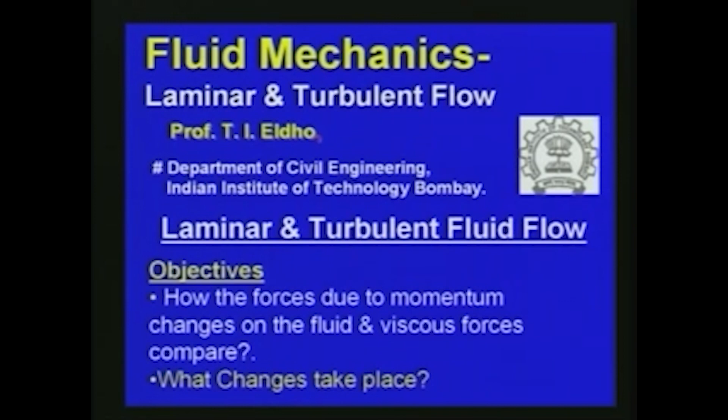So the main objectives of what we are studying in this chapter: we will be checking how the forces due to momentum changes on fluids and the viscous forces compare. So the effect of viscosity, how the flow parameters will be changing, what changes take place, how the fluid will be behaving with respect to viscosity, and how the system will be either laminar or turbulent. So that we will be checking, and then we will look into various types of flow.

We will be checking one of the important aspects, the so-called Reynolds experiments, where Osborne Reynolds utilized his experiments to classify the flow as laminar, turbulent, and other cases. Then we will be discussing laminar flow between parallel plates, laminar flow in pipes, and also turbulent flow in pipes. These are the main objectives which we will be studying in this particular chapter on laminar and turbulent flow.

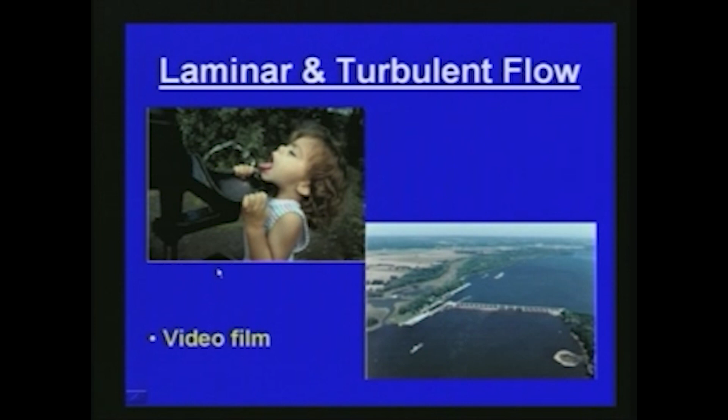One of the experiments we did in our hydraulics lab was a sump pump test. Here you can see one open channel, where the flow is initially laminar, and then there are some pumps, and due to the pumping effect the flow velocity or discharge variation takes place and the velocity increases.

Then the laminar flow at some part of the channel becomes turbulent. The flow becomes very much disturbed, and the laminar flow is transformed into turbulent flow. So in many places, initially the flow may be laminar, and then sometimes it may be laminar, sometimes turbulent.

With respect to this, we will now discuss further what are the important parameters which decide whether the flow is laminar or turbulent, how we can classify the flow, and then we will discuss further theories related to laminar and turbulent flow.

So now, in the same experiment which you have seen in the video, this is a laminar flow, and here due to the pumping effect it is again becoming turbulent. So in some places it is laminar, some places it is in a transitional stage, and here you can see the flow becomes turbulent.

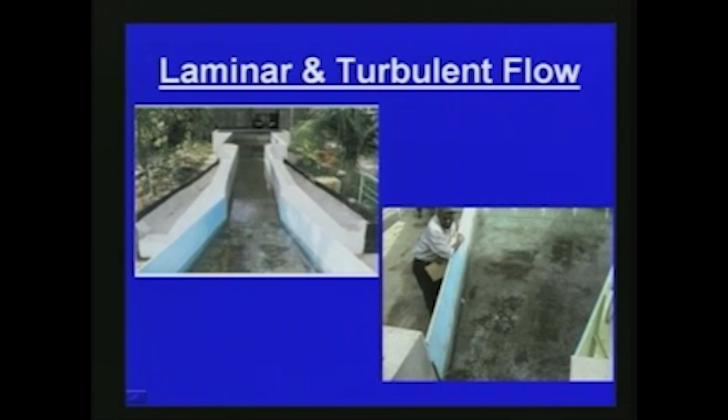So now, with respect to the various theories on laminar and turbulent flow, you can see that most of the time we are dealing with real fluids. As far as real fluids are concerned, viscosity of the fluid is a very important parameter, and viscous effects play a major role.

Due to the viscous effect, as shown in this slide, there will be a no-slip condition on the boundaries. The flow, before becoming fully developed, is affected by boundary layer effects and viscosity effects. Initially the flow can be laminar, and then after some time, depending upon the flow condition, it can become turbulent. So viscous effect is very important in fluid mechanics in the case of real fluids.

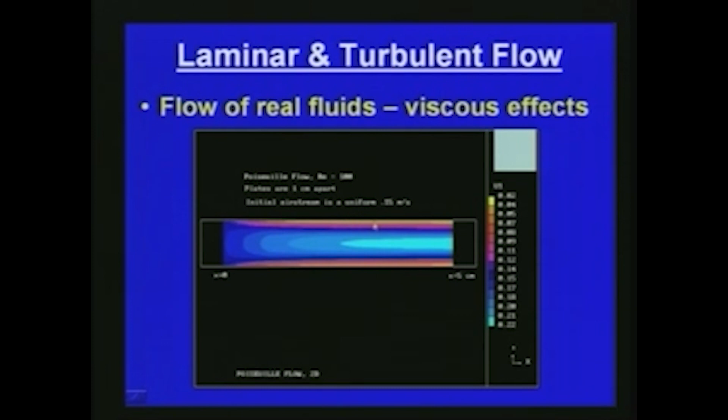Due to the viscosity or viscous effects, the fluid tends to stick to the solid surface on both sides. Due to this sticking effect, or no-slip condition, a boundary layer is created, and the flow pattern can change whenever the flowing fluid is interacting with a solid surface.

Similarly, stresses also play a major role as far as the flow is concerned, when we are classifying the flow into laminar or turbulent. These stresses are also very important - shear stresses, normal stresses - and how they act within the fluid is also very important.

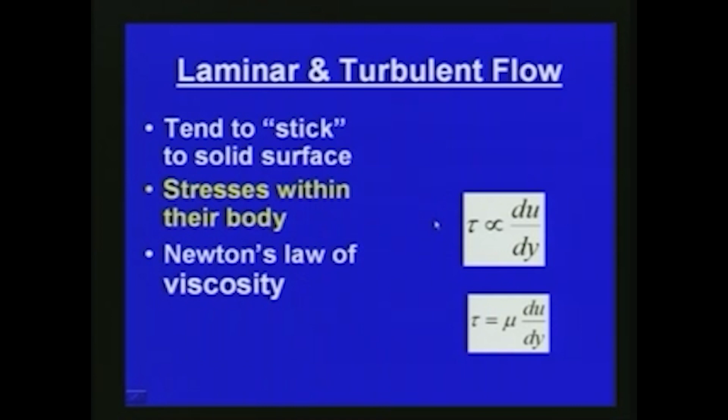While discussing laminar and turbulent flow, another important aspect is Newton's law of viscosity. We have already seen in our introductory lectures that Newton's law of viscosity states that the shear stress is proportional to the velocity gradient: tau is proportional to du by dy.

With respect to the dynamic coefficient of viscosity, we can write tau equals mu times du by dy. This is Newton's law of viscosity: the shear stress is equal to the dynamic coefficient of viscosity multiplied by the velocity gradient. This law is also very important when we discuss laminar and turbulent flow.

Now we are discussing laminar and turbulent flow. With respect to this, it will be interesting to revisit the earlier classification from our introductory lectures - the types of fluid flow. We have seen that fluid flow can be classified with respect to rheological considerations like liquids and gases, and dilational considerations like whether it is compressible or incompressible.

Temporal variations with respect to time, whether the fluid flow is transient or steady state, and spatial dimensions, whether the flow we are considering is one, two, or three dimensional, and also the motion characteristics - whether it is laminar or turbulent. These types of fluid flow we have already discussed earlier.

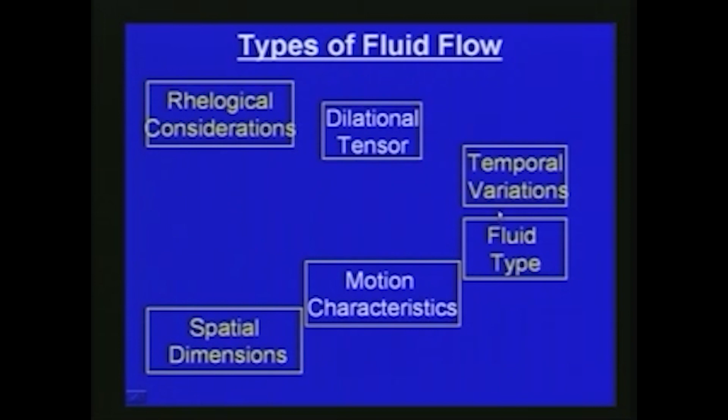When we discuss in detail about laminar and turbulent flow, various aspects are important: what kind of fluid we are dealing with, what kind of motion characteristics, what spatial dimensions we are considering, and what temporal variations - all these are important when we discuss whether the fluid is laminar or turbulent.

Accordingly, this chart we have seen earlier in our introductory lecture shows that fluid flow can be classified as gas or liquid, or with respect to dilational characteristics - whether the fluid flow is compressible or incompressible - or with respect to temporal variations - whether it is transient or steady state.

With respect to viscous effect, whether viscosity is considered or it is an inviscid, non-viscous fluid, and also rotational flow or irrotational flow - especially for turbulent flow, the rotational effect is very important - and also the dimensions considered, whether one, two, or three dimensional. These types of fluid flow parameters are very important with respect to what we are discussing now: laminar or turbulent flow.

Before going into more details of laminar and turbulent flow, the types of fluid flow can also be classified according to the geometry of the flow field. Most flow, with respect to geometry, can be classified as either internal flow or external flow. Internal flow means it involves flow in a bounded region.

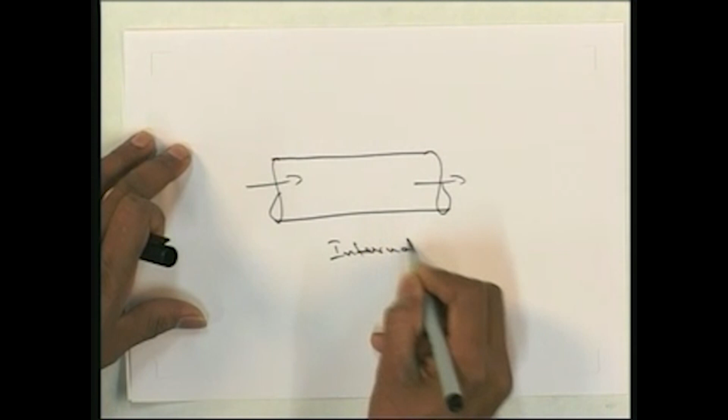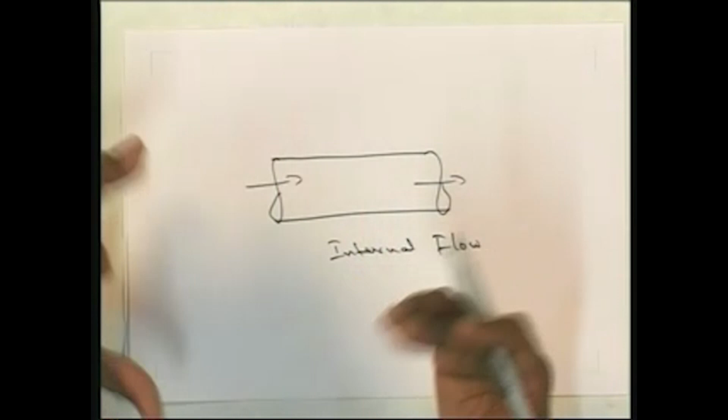An example is pipe flow, just like you can see here. The flow is taking place in this way, and we call it internal flow because the flow is confined within the boundary of the pipe. That is why we say it is internal flow. The approach we use to analyze this kind of flow will be different from what we call external flow. This pipe flow is an example of internal flow.

The other classification based on geometry is external flow, where the fluid flows in an unbounded region. It can be just like the flow pattern around a body immersed in the fluid.

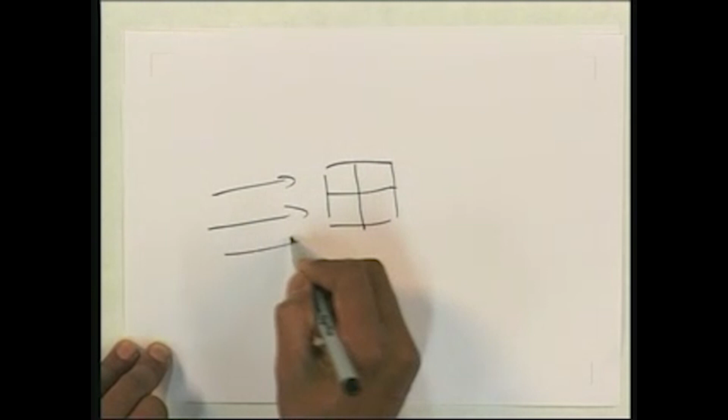For example, consider a building. If the wind comes, you can see what happens with respect to the surrounding of the building. This is very important for many engineering designs. This kind of flow, where we look at what happens around a particular body or structure, where the fluid flow is in an unbounded region, is so called external flow.

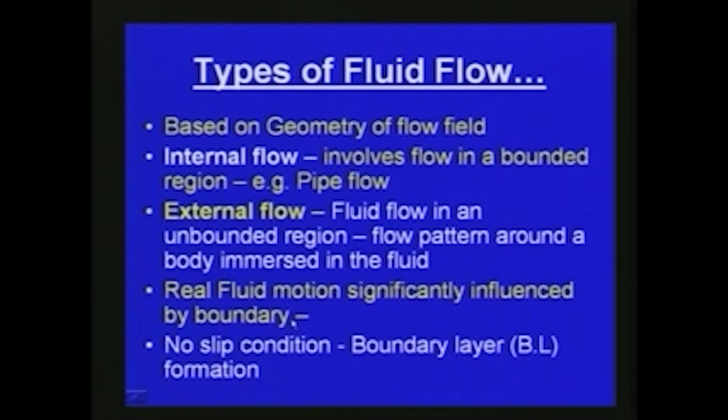This is also very important when we discuss laminar and turbulent flow. The real fluid motion is significantly influenced by the boundary, whether it is internal flow or external flow. As in the case of pipe flow, the solid surface where the fluid is in contact has a no slip condition.

So the boundary is very important. The no slip condition and boundary layer formation are very important as far as flow is concerned, whether it is internal flow or external flow, such as around a building or whenever a boat is moving in a river. What happens surrounding the boat or the ship is very important. The formation of the boundary layer is also important with respect to the laminar and turbulent flow we will be discussing, whether it is external or internal flow.

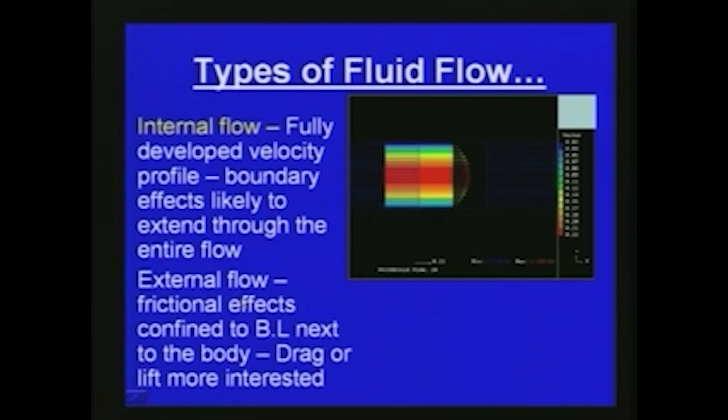This is again the internal flow case. As far as external flow is concerned, the frictional effects are confined to the boundary layer next to the body, and here the drag or lift are more important. For example, whenever a balloon is lifting through the air, you can see what happens with respect to the lift effect or the drag effects. That is also very important as far as the types of fluid flow are concerned. This is the case of external flow.

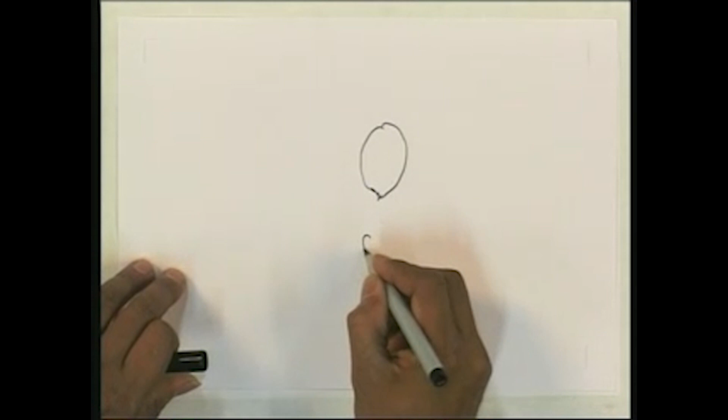As far as laminar and turbulent flow is concerned, whenever we discuss these kinds of problems, we have to see whether the flow is external flow or internal flow. Now, for the case of free flowing water, let us inject a dye into the middle of a stream.

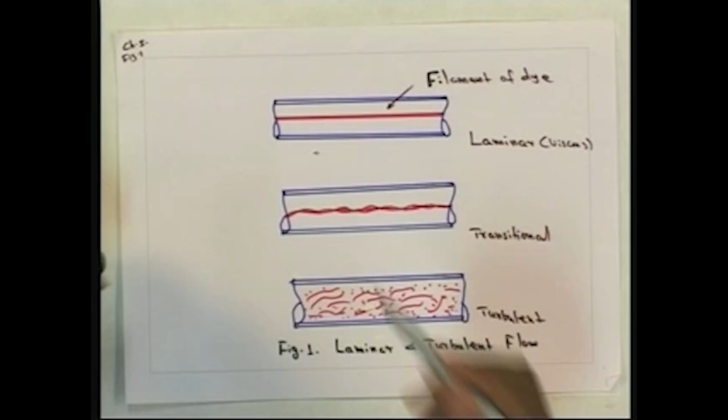So here you can see, if we inject a dye into the middle of a pipe flow, with respect to the velocity of the flow in the pipe, initially the fluid velocity is small. Then the dye which we are injecting will just be moving like a filament of dye, in layers. So this is what we call laminar flow, where the flow is in layers and there is no disturbance taking place.

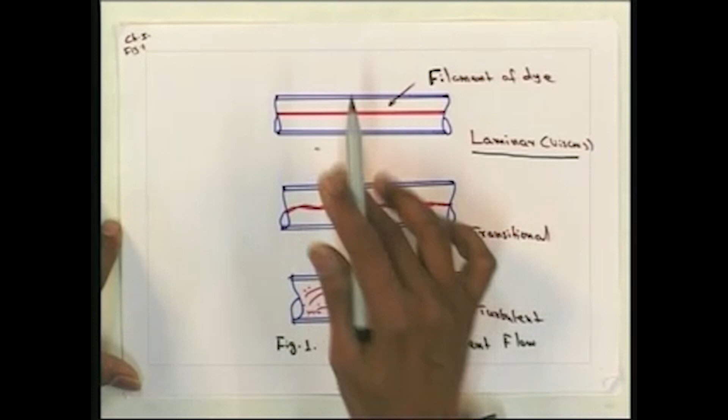But then the velocity of the flow increases. So after some time, in the second figure, you can see slight disturbance starts. Earlier the flow was in layers, and then slight disturbance starts. Finally, when the velocity is further increased, the dye is totally mixing within the fluid, there is a lot of disturbance, the fluids are intermixing, and the dye will be totally mixing with the fluid inside the pipe.

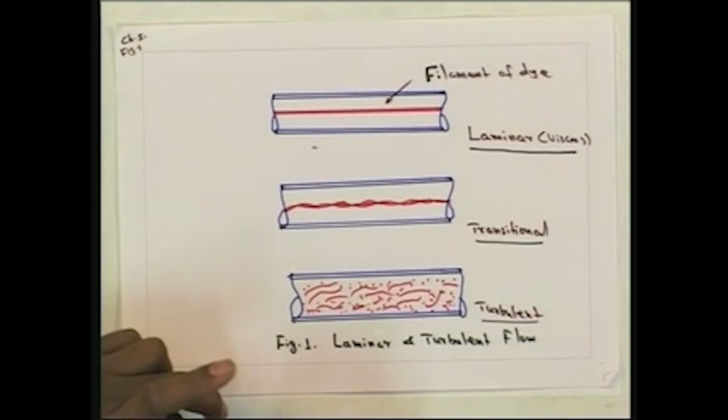So initially when the velocity is small and we are injecting only a small filament of dye, it is laminar. When the velocity is increased, it becomes transitional flow, and finally a lot of mixing takes place and it becomes turbulent flow. In a similar way, a flow may be laminar for some time, but if the flow parameters like velocity change, it becomes transitional, and further it becomes turbulent. So depending upon various flow parameters, the fluid flow changes from laminar to turbulent.

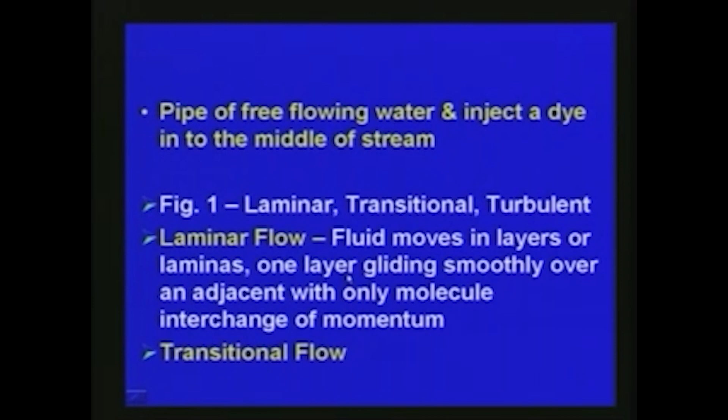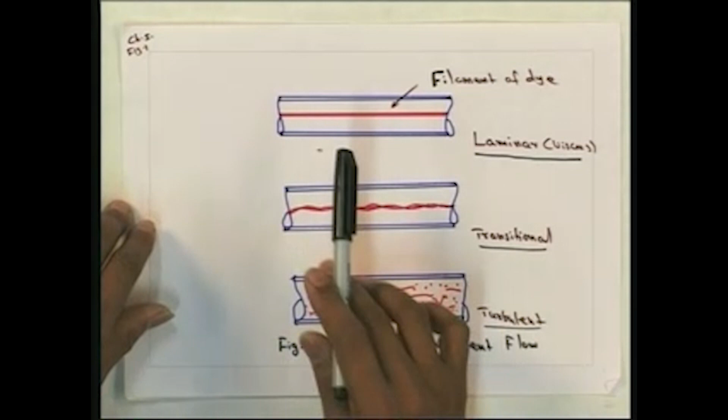So now, with respect to what we discussed, what is laminar flow? In laminar flow, the fluid moves in layers or laminas. We define laminar flow as the fluid moving in layers or laminas, one layer gliding smoothly over the adjacent one, with only molecular interchange of momentum. You can see this with respect to the first figure: the fluid moves in layers, one layer gliding smoothly over the adjacent layer, with only molecular interchange of momentum taking place. This is the definition of laminar flow.

But as I mentioned, when the velocity or other flow parameters change, some kind of mixing takes place. Instead of smooth gliding, mixing starts, and we say that the flow is transitional.

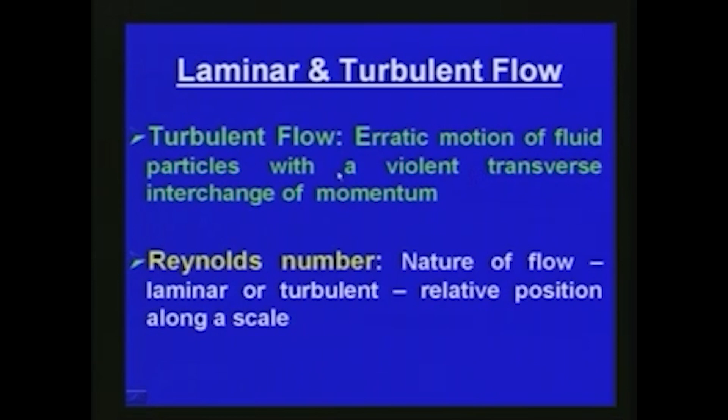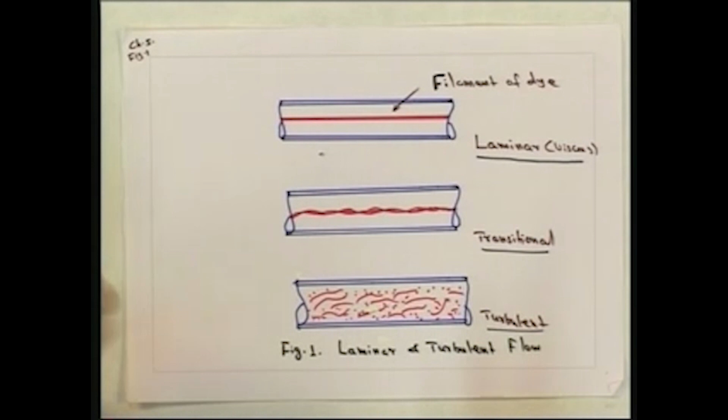As far as turbulent flow is concerned, there is erratic motion of fluid particles with a violent transverse interchange of momentum. So turbulent flow is defined as erratic motion of fluid particles with a violent transverse interchange of momentum. Whenever we injected the dye, when the velocity is increased or other flow parameters change, there is total mixing of the dye within the fluid, and the flow becomes totally turbulent. So we define turbulent flow as a flow where there is erratic motion of fluid particles with a violent transverse interchange of momentum.

So now the question is: whenever a fluid flow is there, how can we define whether it is at the laminar stage, the transitional stage, or the turbulent stage? This is a very important question, since most of the time we will be dealing with pipe flow, open channel flow, river flow, canal flow, and many other kinds of flow. So it is very important to see whether the fluid flow is laminar, transitional, or turbulent.

The reason is that most of the theories we apply to laminar flow may not be applicable to turbulent flow. So many flow parameters need to be changed, and the theories will change as the flow changes from laminar to turbulent.

In most fluid flow cases it is very important to define whether the existing flow is in laminar state, in transition state, or turbulent state. A large number of scientists and engineers worked on this topic, and in the late 19th century, around the 1880s, famous scientist Osborne Reynolds defined a number called the Reynolds number. Using this dimensionless number, we can define whether the concerned flow is laminar or turbulent.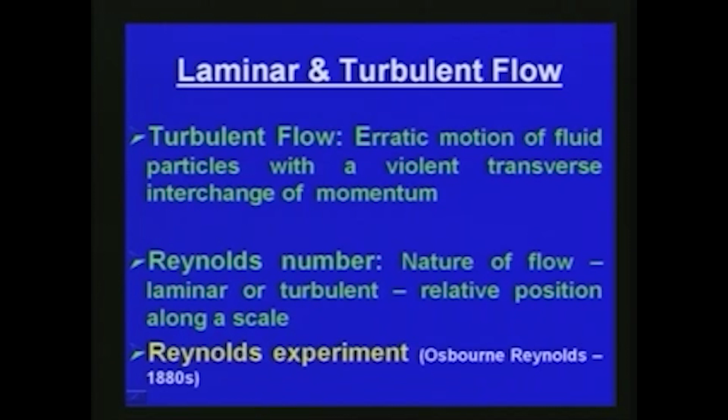For example, in open channel flow, if the Reynolds number is less than or equal to 500 the flow is laminar, or when it exceeds 600 or 1000 it becomes turbulent. So this Reynolds number is a relative scale that gives the position of whether the flow is laminar or turbulent. Osborne Reynolds defined this number based upon a large number of experiments with respect to fluid movement, called Reynolds experiments, conducted in the 1880s, end of the 19th century, and from these he defined this so-called Reynolds number.

In the Reynolds experiment, there is a large tank where water is filled, and a pipe is connected to that tank with a valve attached at the end of the pipe. A small tank containing dye is introduced inside the large tank, and through a small nozzle the dye is introduced into the pipe where the pipe starts, as shown in the figure. Then he slowly started to open this valve.

You can see the flow with respect to the dye, and the fluid movement is laminar in nature. With respect to this color we can easily identify this. Initially, whenever the valve opening is small, the velocity is small and the discharge is also small.

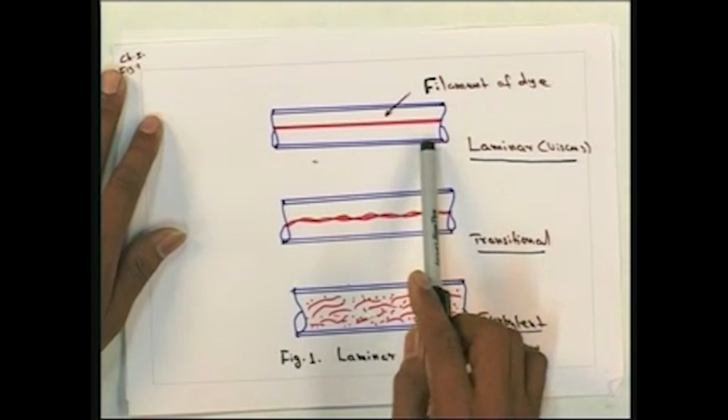With respect to the dye we can visualize the fluid moving in layers or laminas. When the valve is opened more, the fluid which is moving in layers starts to show some disturbances, and some oscillation begins in the fluid.

When the valve is opened further, the velocity increases, and with respect to the dye movement we can visualize that mixing takes place, interchange of masses occurs, and erratic motions take place, and finally the flow becomes turbulent.

That is what Osborne Reynolds did in the 1880s, and based on a large number of experiments as mentioned, he defined the so-called Reynolds number which we have seen.

After many experiments, Reynolds showed that a particular ratio, rho V D by mu — where rho is the mass density of the fluid, V is the average velocity, D is the diameter of the pipe, and mu is the dynamic coefficient of viscosity — helps to predict the change in flow type. He defined this ratio as the Reynolds number, which is a dimensionless number.

Osborne Reynolds defined this number as the Reynolds number, which is the ratio of inertial forces to viscous forces. So the Reynolds number equals inertial forces divided by viscous force, and for pipe flow we define it as rho V D by mu, where rho is the mass density of the fluid, V is the average velocity, D is the diameter of the pipe, and mu is the coefficient of dynamic viscosity.

So similarly we can define this Reynolds number for open channel also. With respect to his experiments, he put this Reynolds number as a scale to define whether the fluid flow is laminar, whether it is in the transitional stage, or whether it is in the turbulent stage.

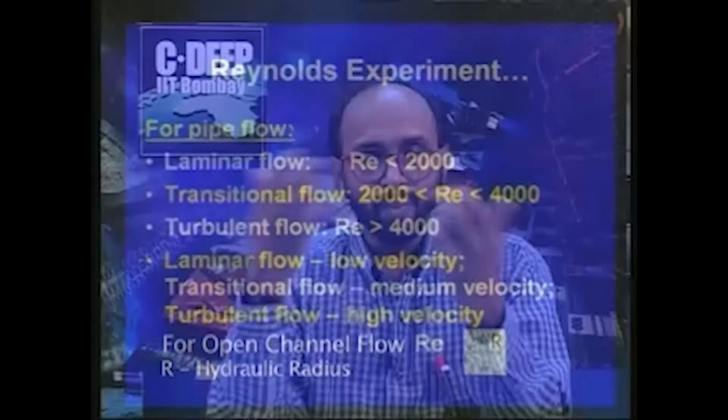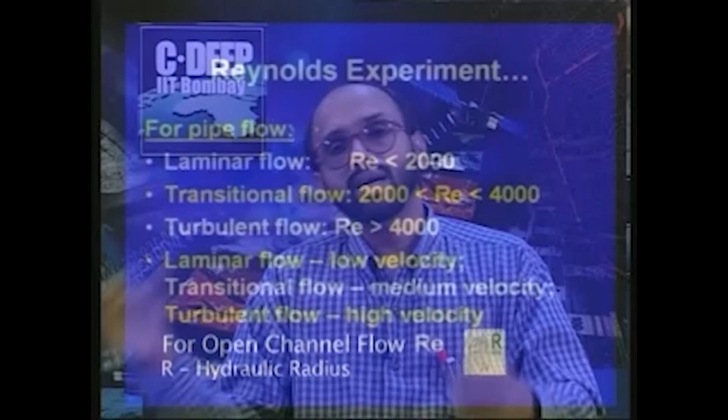Now with respect to this Reynolds number, let's consider pipe flow. We can show that generally, with respect to various conditions, when the Reynolds number is less than or equal to 2000, the flow is laminar. In the range between 2000 to 4000, mixing and disturbance start, and a transitional state occurs. Beyond 4000, when the Reynolds number is greater than 4000, the flow becomes turbulent. So for pipe flow, below 2000 the flow is laminar, between 2000 to 4000 it is transitional, and beyond 4000 the flow is turbulent.

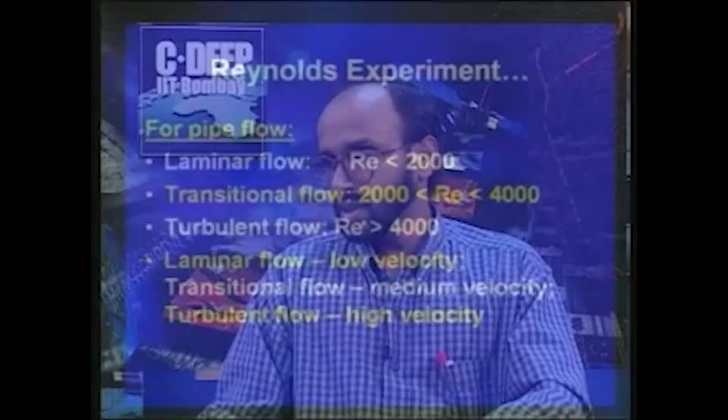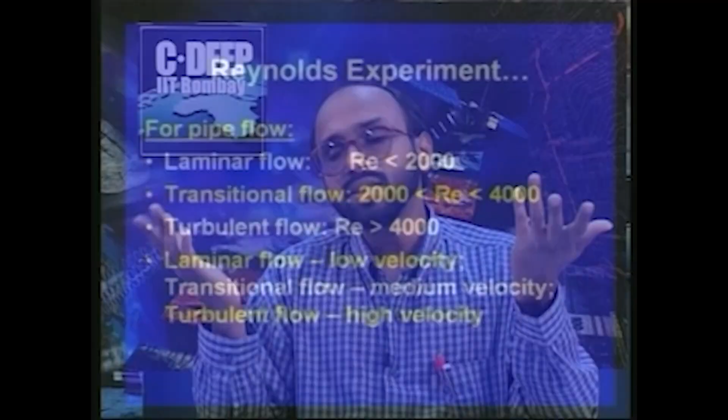Through experiments we can show when the flow is laminar. With respect to the Reynolds number, we can see that whenever the flow is laminar, the velocity is low. At transitional flow there is medium velocity, and when the flow becomes turbulent, the velocity is high. So this is the case of pipe flow.

Similarly, if we do experiments in open channel with respect to various conditions, generally the flow will be laminar when the Reynolds number is less than or equal to 500, and from 500 to 2000 it may be at a transitional stage, though this can vary slightly. Beyond 2000, open channel flow can be turbulent in nature. This exact range depends on various other flow conditions existing in the flow regime, such as boundary conditions or initial conditions. Depending upon these, the range can vary, but approximately this is the range put forward by various scientists and engineers for open channel flow and pipe flow.

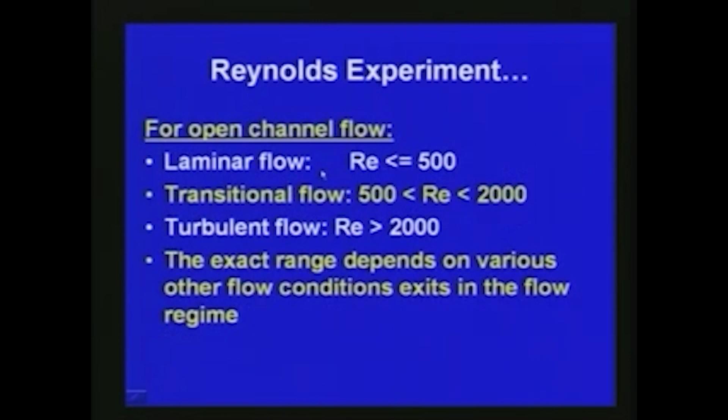Now, with respect to the Reynolds experiments we have seen, we can put forward certain interpretations. First, when viscous forces are dominant—recall the Reynolds number is the ratio of inertial force to viscous force—we can interpret that when viscous forces are dominant, the flow is slow, or the Reynolds number is low, and they are sufficient to keep all fluid particles in line, so the flow is laminar. Even if there is any tendency for disturbances, for this kind of flow where the velocity is low or slow and the Reynolds number is low, the disturbance will be dampened, and the flow remains laminar since viscous forces dominate.

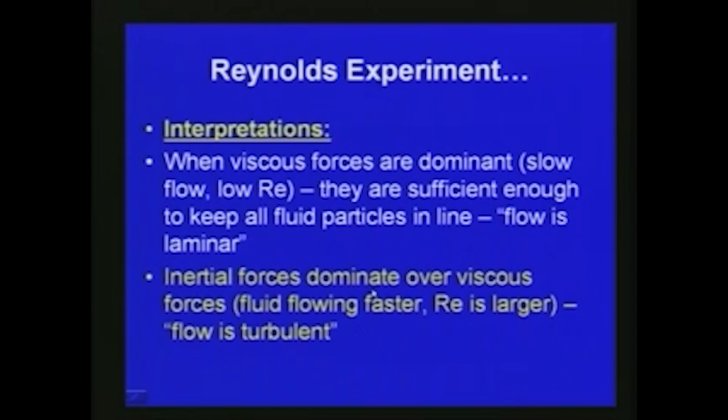Whenever the fluid flow is faster, or the velocity is larger, the Reynolds number is larger, and inertial forces dominate over viscous forces, the flow finally becomes turbulent. So with respect to the fluid flow velocity, depending on whether the Reynolds number is lower or higher, and whether viscous forces or inertial forces are dominant, we can classify whether the flow we are dealing with is laminar or turbulent in nature.

Now, while conducting these experiments, we have seen that in a certain range the flow is laminar, and beyond that it becomes transitional or turbulent. When we conduct a large number of experiments, we can define a lower critical Reynolds number, above which the flow changes from laminar to transitional or turbulent.

So this is the so-called lower critical Reynolds number. Now, for example, consider the velocity of flow with respect to the valve movement, if the velocity is reduced. In a similar way, when the flow transforms from laminar to turbulent in the opposite direction, when we reduce the valve opening, the flow velocity will slowly come down, and there will be a transition from turbulent to transitional or turbulent to laminar. There we define a Reynolds number called the upper critical Reynolds number.

So here, the Reynolds number below which turbulent flow changes to laminar flow. This critical Reynolds number has two ranges: one is the lower critical Reynolds number, and the other is the upper critical Reynolds number.

This critical Reynolds number is what we use to classify flow as laminar or turbulent. This varies depending upon various flow conditions, like what kind of fluid, and what the boundaries are, as we've seen, whether it's pipe flow or open channel flow. So it's difficult to put an exact range for when the flow is transforming from laminar to turbulent, since this depends upon various other flow conditions as well.

But generally we prescribe a lower critical Reynolds number where the flow changes from laminar to turbulent or transitional, and an upper critical Reynolds number where the turbulent flow changes to laminar flow.

Now, whenever we conduct these kinds of experiments in the laboratory, we can see that laminar flow, which we've seen is flowing in layers, at some stages shows instability. Here the inertial forces associated with the fluid mass try to amplify the disturbances in the flow.

Initially if the flow is laminar, there can be different kinds of disturbances like boundary friction or shearing effects. The inertial forces associated with the fluid which is flowing try to amplify the disturbance in the flow. So then we say there is instability of laminar flow.

Viscous forces try to damp these disturbances, but if the forces trying to amplify the disturbance predominate over the viscous forces, then the laminar flow becomes unstable, or instability of laminar flow takes place. Depending on fluid characteristics like mass density, viscosity, velocity gradient, and proximity to boundary, etc., the disturbances are dampened or amplified.

So for the given conditions, if the disturbances are dampened, the flow continues as laminar. But if the disturbances are amplified further due to various forces like shear force or frictional forces, it may change from laminar to turbulent flow, or we say the laminar flow becomes unstable. So if the disturbances are dampened, the flow is laminar; otherwise, we say the flow becomes turbulent.

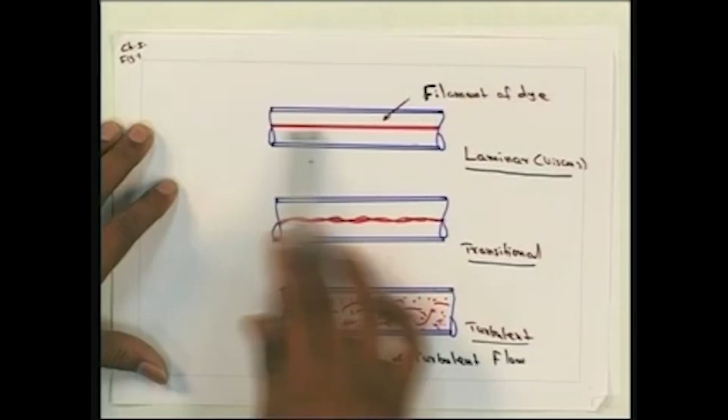Now, with respect to turbulent flow, the important characteristics which we observe in nature or in the laboratory include irregularity. When the flow is laminar, it's very regular, with one layer sliding over the other. But when the flow becomes turbulent, some important characteristics emerge: first, the flow is irregular in nature, and second, diffusivity.

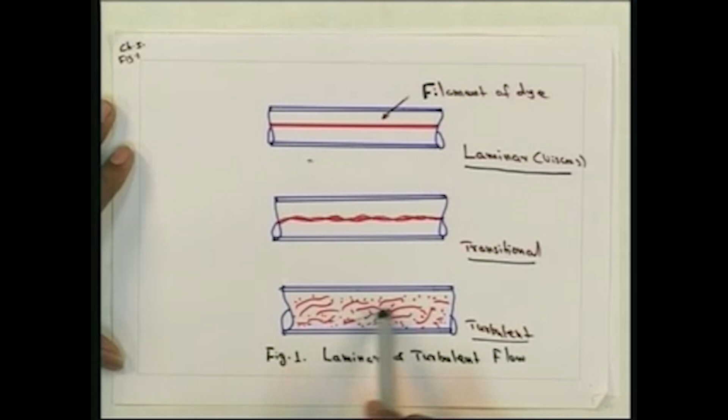As far as diffusivity is concerned, in laminar flow, molecular diffusivity is more important, but in turbulent flow, turbulent diffusivity is much more significant than molecular diffusivity as the flow changes from laminar to turbulent. Other important characteristics include high Reynolds number, as we've already seen, and in many cases the flow may be rotational in nature.

Most laminar flow has very minimal rotational effect, or it can even be irrotational in nature, but most turbulent flow motion will be rotational in nature. Due to this, we have to consider the fluid flow in 3 dimensions, since in one or two dimensions it is very difficult to see what is realistically happening, how the disturbance takes place and in which direction.

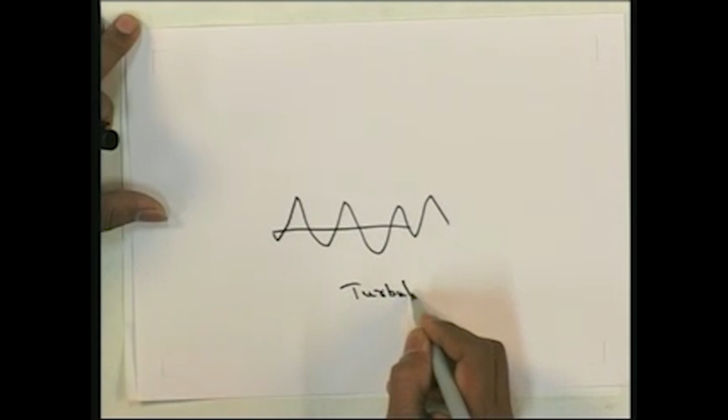So most of the time, as far as turbulent flow is concerned, we have to do 3-dimensional analysis. Motion can be rotational and in 3 dimensions, and then the fluctuations can be wide spectrum. If the flow is laminar, it stays laminar, but whenever the flow becomes turbulent, the fluctuations that take place will be wide spectrum.

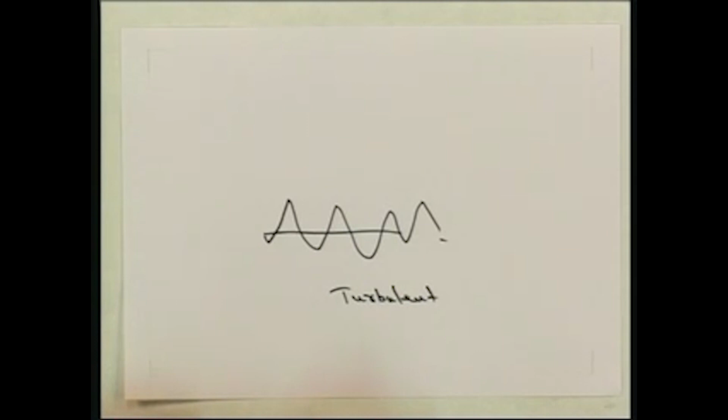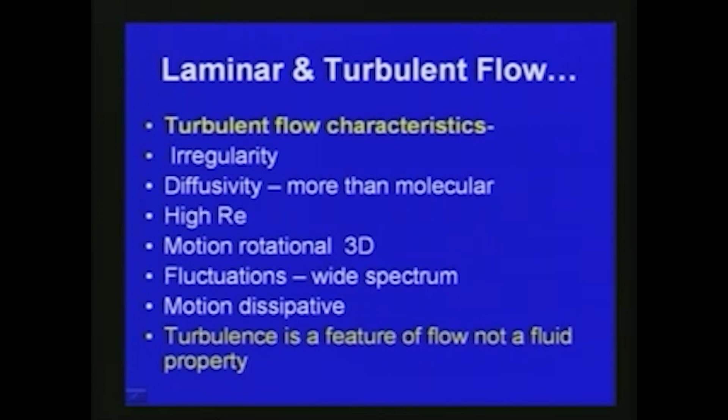Another important characteristic of turbulent flow is that the motion is dissipative, so various energies like heat energy will be dissipated with respect to the turbulent flow. So we can say that turbulence in a flow is a feature of flow, but it is not a fluid property. It is difficult to say turbulence is a fluid property, but we can define it as a feature of the flow.

So now we will be discussing various aspects of laminar flow and turbulent flow in detail in this chapter. Initially we will discuss laminar flow, seeing the various flow characteristics as far as laminar flow between parallel plates, and then laminar flow in pipes. Then further we will discuss turbulent flow.

So the first topic is laminar incompressible flow between parallel plates. Here we will be deriving various relationships like the velocity variation and the shear stress variation, etc., as far as laminar incompressible flow between parallel plates is concerned. Let us consider the flow of a viscous fluid between two very large parallel flat plates spaced at a distance of 2h, or equal to 2y, apart.

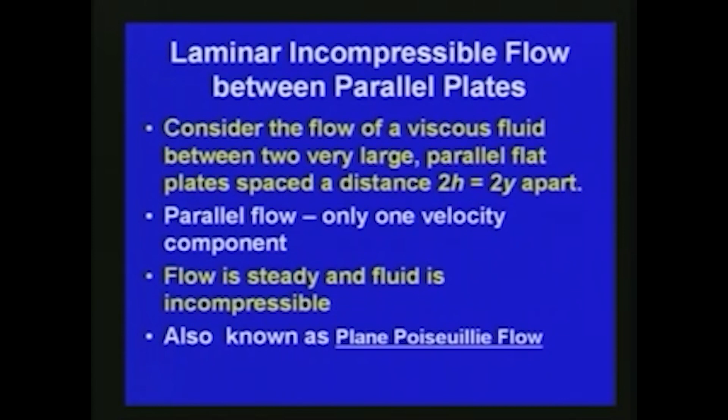Starting with 0 on both sides and maximum at the center. So if you plot the velocity, we can see that it will be parabolic in nature, 0 on both sides of the parallel plates and then maximum at the center.

Now we will discuss further to get the velocity variation. Once the velocity variation is known, we can find out the shear stress or other fluid flow parameters. So we are considering the flow as two-dimensional in nature. For two-dimensional flow, we have already seen that the continuity equation we can write as del u by del x, where velocity in x direction is u, and velocity in y direction is v.

We can write from the continuity equation del u by del x plus del v by del y is equal to 0. This is the continuity equation. Now since the streamlines are straight, if you plot the streamlines they are parallel, and it is parallel to the x direction.

So you can see that here the velocity component v is equal to 0. So finally, for this particular case, there will be only one velocity component in the x direction, the other velocity component v is equal to 0.

So from this continuity equation we can write del v by del x is equal to del v by del y, and since v is equal to 0, del v by del x is equal to del v by del y is equal to 0.

If we put this into the continuity equation, we can write del u by del x is equal to 0. That means for this particular case, laminar incompressible flow between parallel plates, velocity does not change with x, velocity field v is equal to 0, and the velocity u is changing with respect to y only.

As you can see the plot here, the velocity is varying with respect to y only, so u is a function of y as written here.

With respect to these simplifications, we can see that the flow is one dimensional and unidirectional. So the flow is one dimensional and in one direction. This type of flow with the velocity profile unchanging as the fluid moves downstream is so called a fully developed flow. You can see the velocity profile here is unchanging as the fluid moves downstream, so we say it is fully developed flow.

Now we want to find out the velocity distribution. We want to get an expression for the velocity variation so that we can plot the velocity. Here we derive the expression for velocity by using the first principle, or Newton's second law, which we have already discussed about and its application earlier.

By using Newton's second law for a particle in the control volume which we are dealing with, we can write mass of particle multiplied by the acceleration of particle is equal to net pressure force on the particle plus net gravity force on particle plus net stress force on particle.

So here we use Newton's second law to derive the equation. For the x direction from Newton's second law, we can write mass into acceleration is equal to pressure force plus gravity force plus shear force. If we consider a small fluid element with mass delta mp and acceleration ax in the x direction, that is equal to delta fx pressure plus delta fx gravity plus delta fx shear.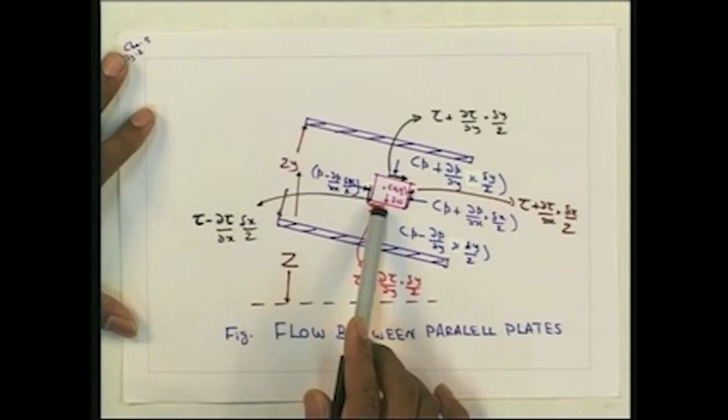So we consider a small fluid element and write the pressure force. On the left side, with respect to this fluid element, we write P minus del P by del x into delta x by 2. Here delta x is the size of the fluid element in the x direction, delta y is the size in the y direction, and the plate is placed at a distance of 2y.

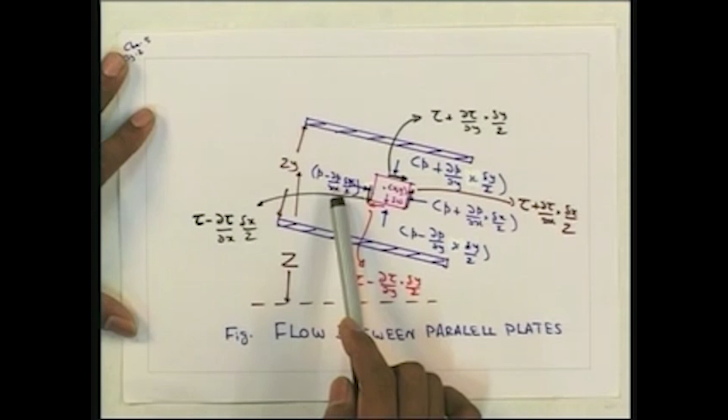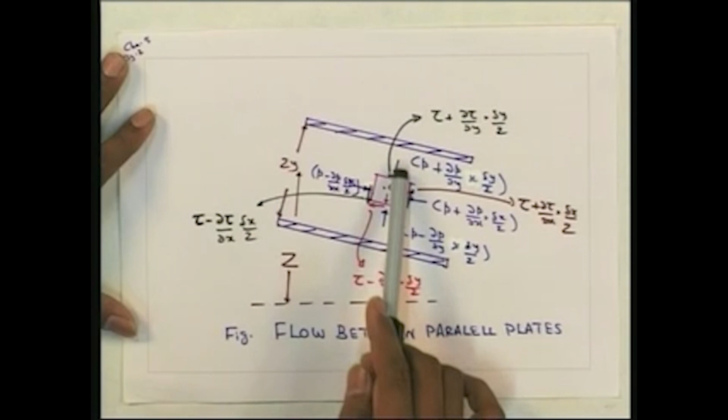So the pressure force on one side is P minus del P by del x into delta x by 2, and on the other side of the fluid element it is P plus del P by del x into delta x by 2. On this side we write P plus del P by del y into delta y by 2, and on the opposite side it is P minus del P by del y into delta y by 2.

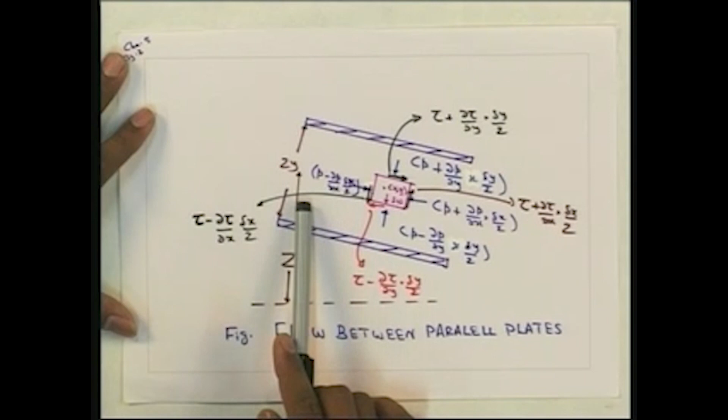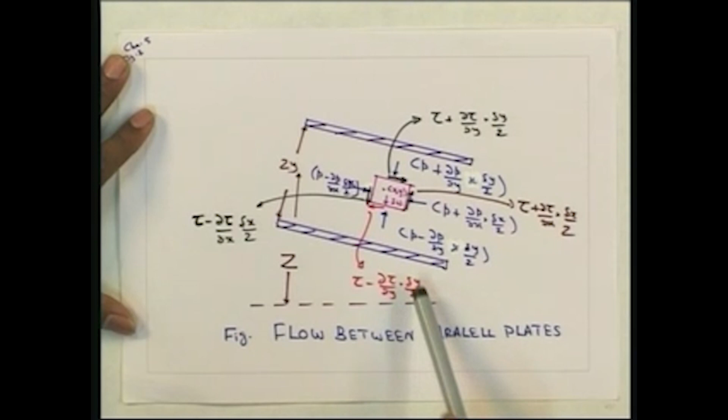Similarly, considering the shear stress, which is another important shear force, on one side we write tau plus del tau by del y into delta y by 2, on another side tau plus del tau by del x into delta x by 2, on another side tau minus del tau by del y into delta y by 2, and on the last side tau minus del tau by del x into delta x by 2.

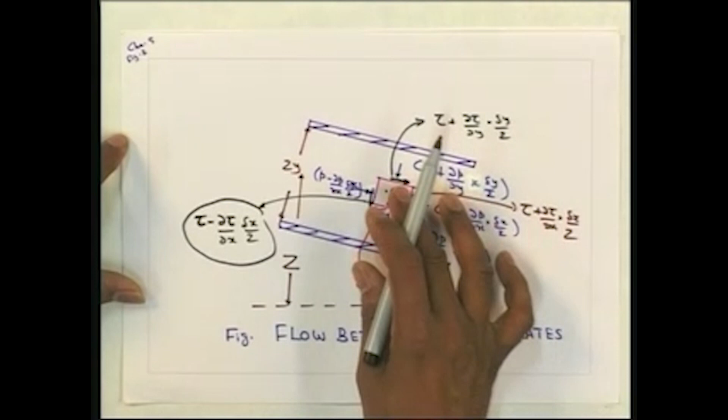So now we are considering this control volume and a fluid element, taking into account all the pressure forces and shear forces. Finally, with respect to this, we can write delta fx pressure as minus del p by del x into delta x into delta y, and if we consider unit thickness, it is multiplied by 1.

Similarly, for the gravity force, delta fx acting on the fluid element will be rho gx into delta x into delta y into 1. This gives the gravity force. For the shear force, with respect to the earlier figure shown, we write del tau by del y into delta x into delta y into unit thickness.

Now by using Newton's second law for the fluid particle or fluid element, the mass of the fluid element multiplied by its acceleration is equal to the pressure force on the fluid particle plus the gravity force on the fluid particle plus the shear force on the fluid particle.

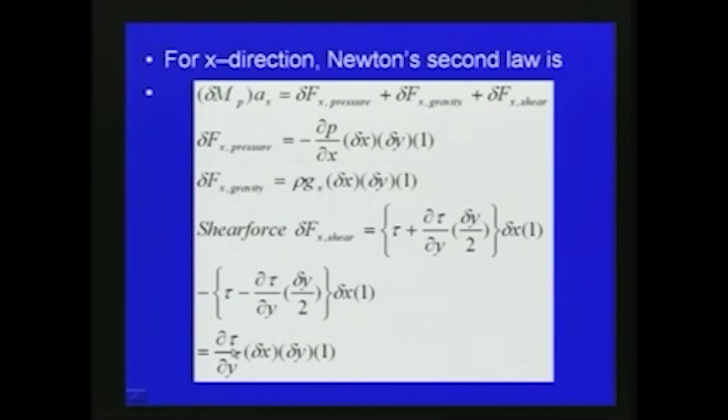So we derived the expression for the pressure force on the fluid element as minus del p by del x into delta x into delta y, the gravity force as rho gx into delta x into delta y, and the shear force as del tau by del y into delta x into delta y.

Now, the acceleration of the particle, as we have seen earlier, we write Ax equal to del u by del t plus u into del u by del x plus v into del u by del y. This gives the local acceleration plus convective acceleration, so Ax equals del u by del t plus u into del u by del x plus v into del u by del y.

Here we are considering the flow as steady state, so del u by del t is 0, del u by del x is 0, and v is 0. So finally Ax is equal to 0.

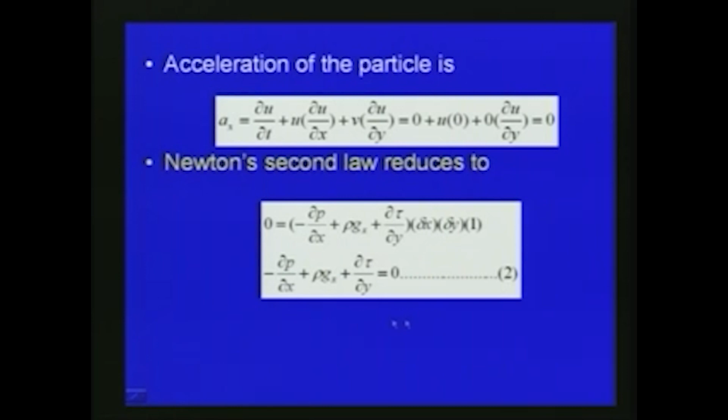So finally Newton's law reduces to: the force is equal to the pressure force plus gravity force plus shear force on the fluid, which is equal to 0. Finally we get the equation as minus del p by del x plus rho gx plus del tau by del y is equal to 0. This is the expression we get for the fluid element we considered.

Now in the earlier equation, considering rho gx, introducing the z coordinate pointing upward opposite the gravity vector, we can write minus del p by del x minus rho g del z by del x plus del tau by del y is equal to 0.

Here you can see that the density rho and the acceleration due to gravity G are constant, so we can combine these two terms and write del by del x of P plus gamma Z plus del tau by del y is equal to 0. So finally we get the expression as minus del by del x of P plus gamma Z plus del tau by del y is equal to 0.

So similar to what we have seen earlier in the x direction equation, we can write in the y direction: minus del by del y of (P plus gamma Z) plus del tau by del x is equal to 0.

Since the velocity profile does not change in the x direction, we can write del tau by del x is equal to 0, and hence del by del y of (P plus gamma Z) is equal to 0. So the pressure distribution in the y direction is hydrostatic, and the term P plus gamma Z is a function of x only.

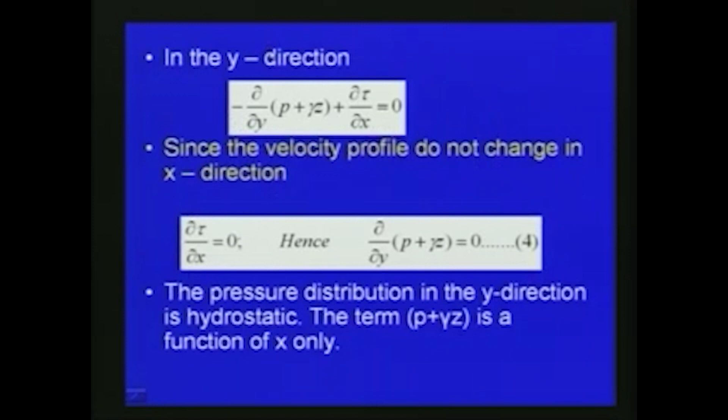So the earlier equation number 3 in the x direction can finally be written as minus d by dx of (P plus gamma Z) plus del tau by del y is equal to 0, equation number 5. Using Newton's law of viscosity, tau is equal to mu into del u by del y. Substituting for tau, we get minus d by dx of (P plus gamma Z) plus mu into del square u by del y square is equal to 0.

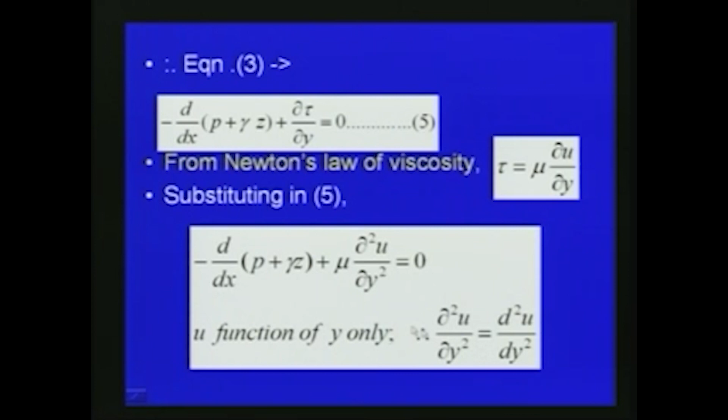This is the final expression connecting pressure variation and velocity variation. Since u is only a function of y, del square u by del y square can be written as the derivative d square u by dy square.

So we can write mu into d square u by dy square is equal to d by dx of (P plus gamma Z), and if we put P tilde equal to d by dx of (P plus gamma Z), finally d square u by dy square is equal to P tilde by mu, where mu is the coefficient of dynamic viscosity.

Our aim is to get an expression for velocity, so we integrate this expression twice and write u is equal to P tilde by 2 mu, y square, plus C1 y plus C2.

Now we introduce the boundary conditions on the plate. Due to the no slip condition, at y is equal to plus or minus Y, the velocity is 0.

From this boundary condition, the constant of integration C1 is equal to 0, and we get C2 is equal to minus P tilde Y square by 2 mu. So C2 is minus P Y square by 2 mu, and C1 is equal to 0.

Finally we get an expression for u, the velocity variation, equal to minus P tilde Y square by 2 mu into (1 minus y by capital Y, all squared), where the distance between the plates is 2Y.

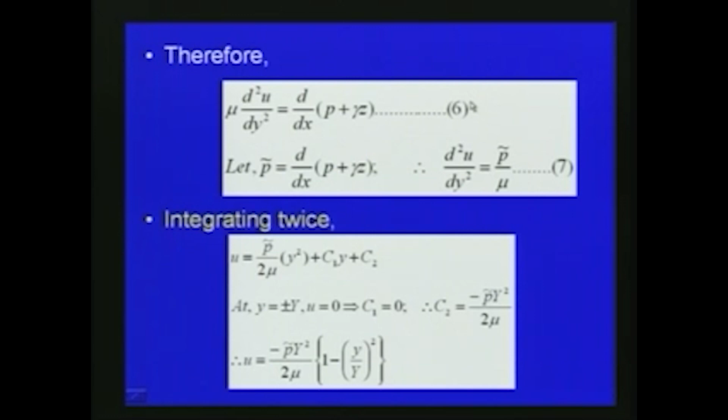So we get an expression for the velocity variation, and with respect to that, the velocity is maximum at the center, that is at y equal to 0, so u max is equal to minus P tilde Y square by 2 mu.

We can also find the average velocity, V bar, equal to 1 by 2Y integrated between minus Y to plus Y of u dy, which gives the average velocity as minus 2 by 3, P tilde Y square by 2 mu, which is equal to 2 by 3 of u max.

If we introduce the term d(p plus gamma z) by dx, which we have already seen, the final expression for velocity can be obtained as u is equal to minus Y square by 2 mu, d(p plus gamma z) by dx, into (1 minus y by capital Y, all squared).

u max can also be written as minus Y square by 2 mu, d(p plus gamma z) by dx, and the average velocity will be 2/3 of the maximum velocity, that is equal to minus Y square by 3 mu into d(p plus gamma z) by dx.

So this is how we derive the relationship for velocity, and from the velocity we can go for other parameters like shear stress variation or pressure distribution. We will continue discussing this laminar flow in the next lecture.